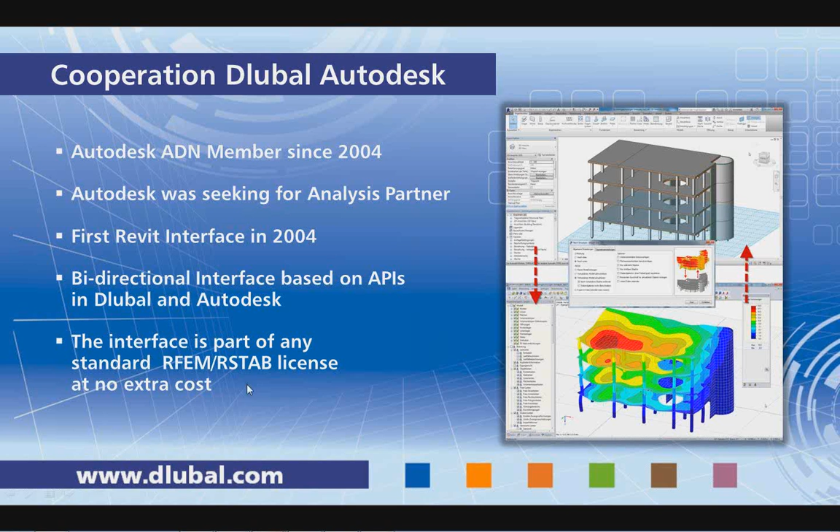The covered BIM scenarios are the following. We can export a Revit model to RFEM, and we can also import an RFEM model to Revit. That means we can use the analytical model which is in Revit and export it to RFEM, which is a great benefit. Not all CAD applications give us this chance. In many cases we have only the physical model, but Revit has the advantage that we have in there also the analytical model that we will see shortly, and we can directly derive a mechanically usable analytical model and start the calculation.

So the dominant way will be to export the Revit model to RFEM, but also in RFEM we can create large models pretty fast, and this work should not be lost, and also it is helpful in many situations that we use it then for further creating of plans or for doing some cost estimation. Or Revit is also a good access point to other Autodesk programs like AutoCAD and other CAD programs that base on AutoCAD. So once we have the model in Revit, we can most likely also use it in various other programs. So this is why we also implemented the export from RFEM to Revit.

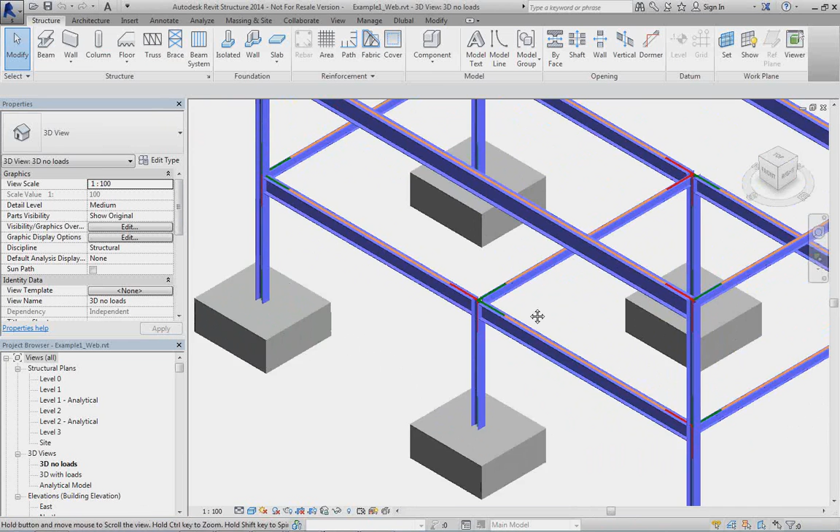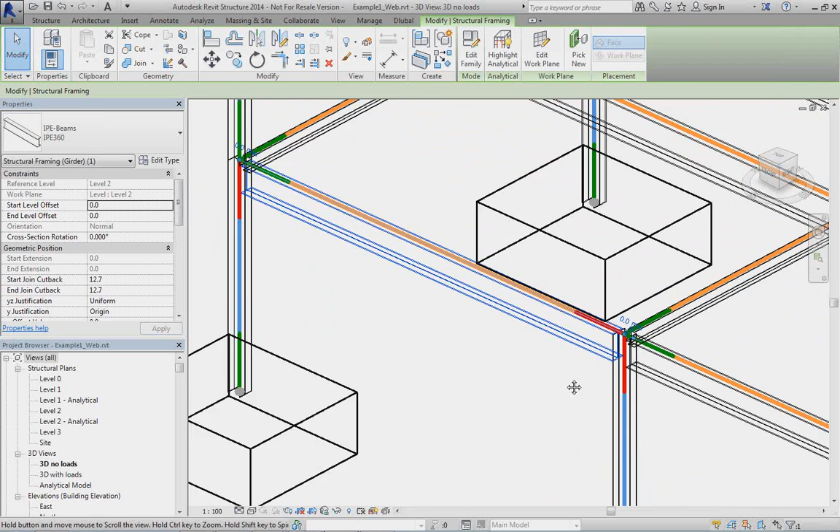In Revit, we see here a simple model consisting of columns and beams and some foundations. I can show the wireframe representation of the model, and we see here the physical model, which are the beams and the columns as we know them, the I-shapes, the I-sections, and we see also the analytical model, which is lying below or behind this physical model.

You can show this analytical model here, and we see that we have here a simple stick bar model, including the analytical nodes, and the beginning and the ending are shown in different colors. So when we click on it, we can see at the start we have different options than at the end. But let me start with the regular representation, and I will explain a little bit how this model works in Revit.

Each beam or each member I can select, and typically there is a dialog with properties, and I can arrange or align the geometric position of this cross-section. I see the cross-section name. I can also say, okay, the geometric position in direction Z should not be top, but maybe in the center. You see the cross-section moves upward.

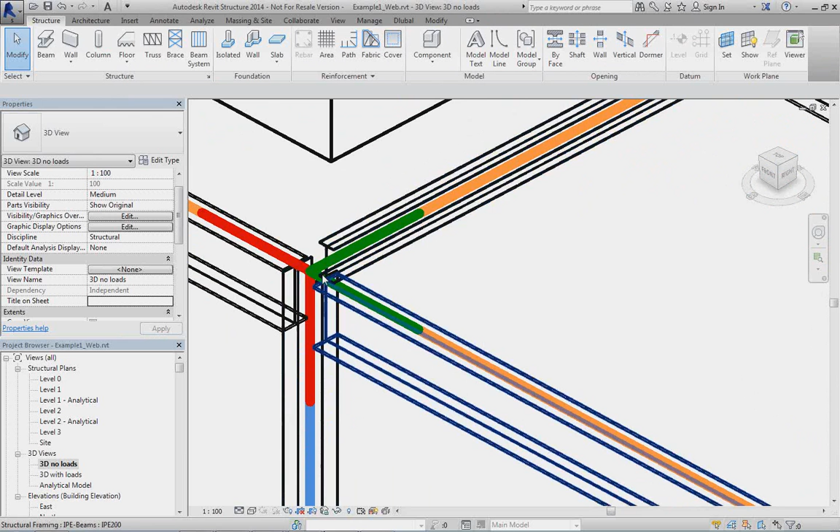You see also that the analytical stick model stayed on the same position. So we have an independent way to model the physical representation and the analytical representation of the model. You can also, when you select the member, enable or disable the analytical model completely. So if I uncheck it, the stick model for the analytical representation will disappear.

So when we export the model to RFEM, we only take the analytical representation of the model. And for example, if the analytical model is disabled, like here, it will not show up in RFEM. So this way you can define which parts of the structure that are of interest for the structural analysis will be exported and which ones will stay in the Revit model.

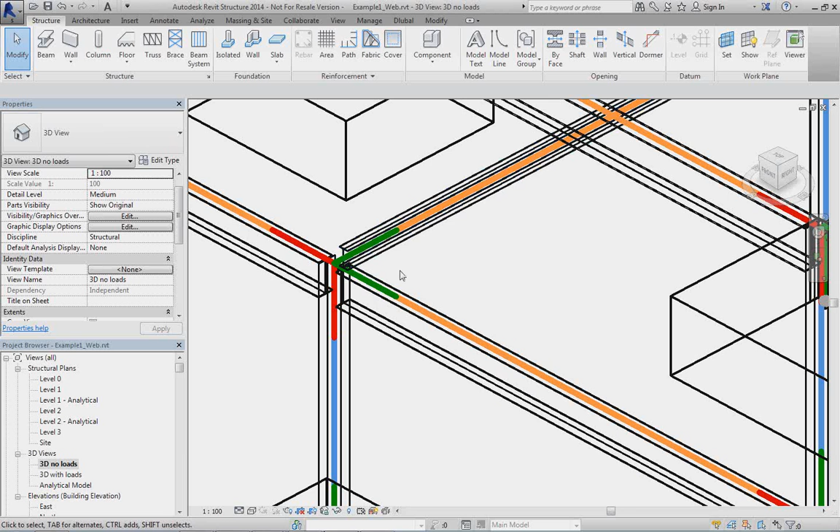Important is when we update the structure later, we do not change the alignment. If there is a new beam imported from RFEM to Revit, it will also always have center alignment because we don't know how we really want to have it in the real world. In Revit, the user can then adjust it. We'll see this also live later. For me, it was important to point out the two different models and show quickly how you can emphasize them, how you can change them.

Also, maybe I make one more change in the analytical model. In the analytical model, there are different properties. Here we deal with typical analytic properties like start release and end release. If I change it, for example, to pinned, then I will get a different release at the beginning and the ending of the member. Or we have also here the analytic alignment. So independently from the physical model, I can change it.

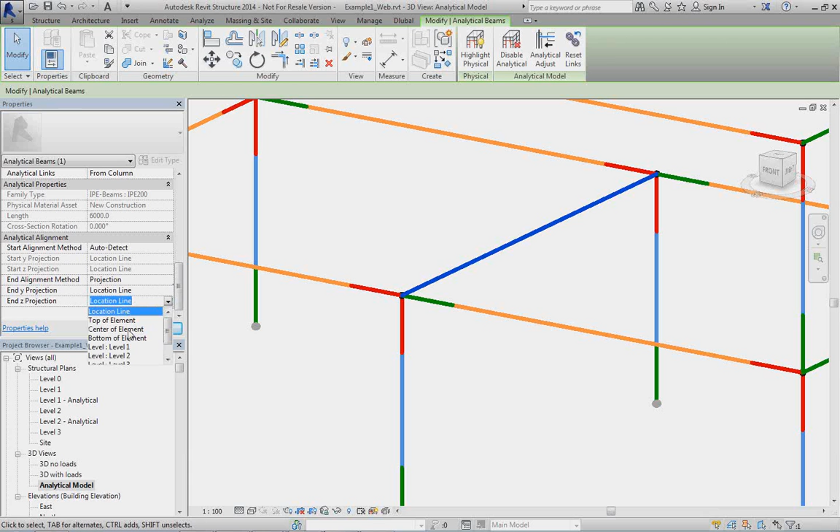For example, I can say the end alignment should be in the center of the element or on the top of the element, maybe center. You see it moves down. Here I would have, maybe I change it to the top. And I can also bind it to a level that I have defined in here.

You see here that it can happen that there is a gap between the two nodes of the horizontal girders and the cross beam here. I can fill this gap with a so-called rigid or analytic link that I can manually also enter in Revit, and it will then also be exchanged with RFEM. So there will be a rigid dummy member that connects those two analytical nodes.

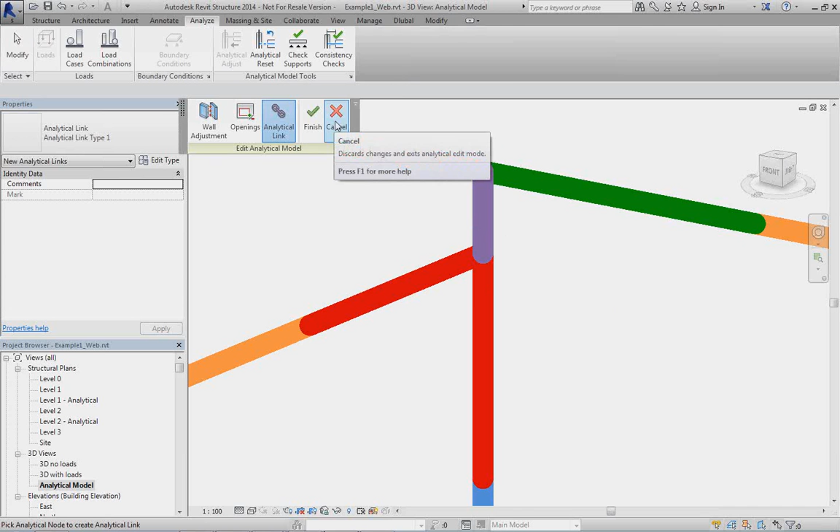So if you want to have really those eccentricities and those gaps of members filled, then you can use analytical links. In some situations also the analytical links are made automatically inside Revit Structure.

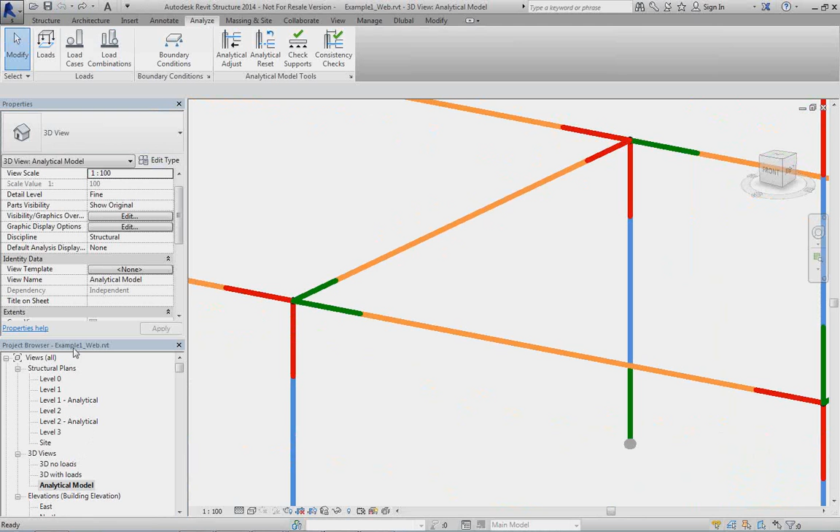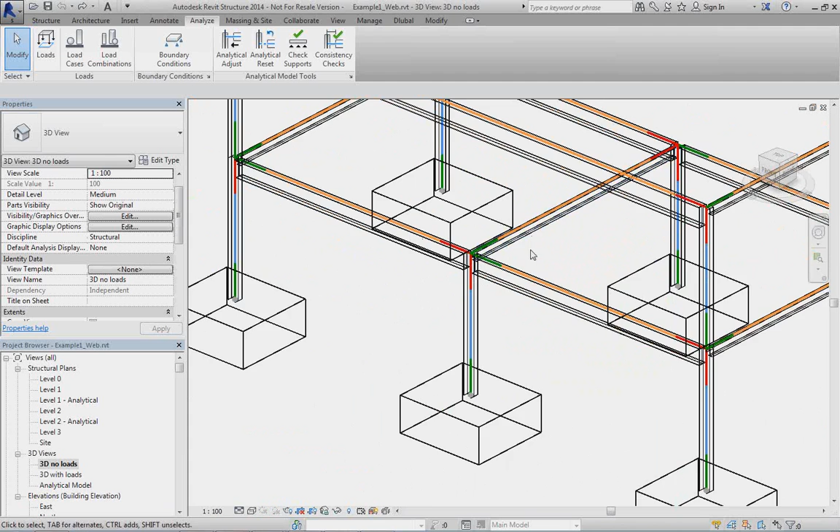Okay, let me maybe go back and start with the original representation of the model, and I go back to how I started out. I think now we are okay. And in the next step, I will then export the model to RFEM. First, I would like to display the wireframe representation so I can see both models in a little bit better way.

Here you see also foundations. Revit has a footing object that we do not have in the same way in RFEM, but typically structural engineers model those footings as a support condition, like an isolated support, and we can do this automatically and convert those footings into isolated supports. There are different options I'm going to show you.

When we start the interface, we find here a global menu, and we can export and import the model to RFEM or also to RSTAB, which is the more simplified version of RFEM that deals only with members and columns but has no surfaces and solids like RFEM does.

Okay, the interface is part of the standard RFEM installation, so it comes at no extra cost. If you would like to install it, all you have to do is install RFEM. Important is that there is already an existing Revit installation. So during the installation process, RFEM can recognize that there is Revit and it will automatically install the plugin. So if you don't have it, just reinstall RFEM and it should be available.

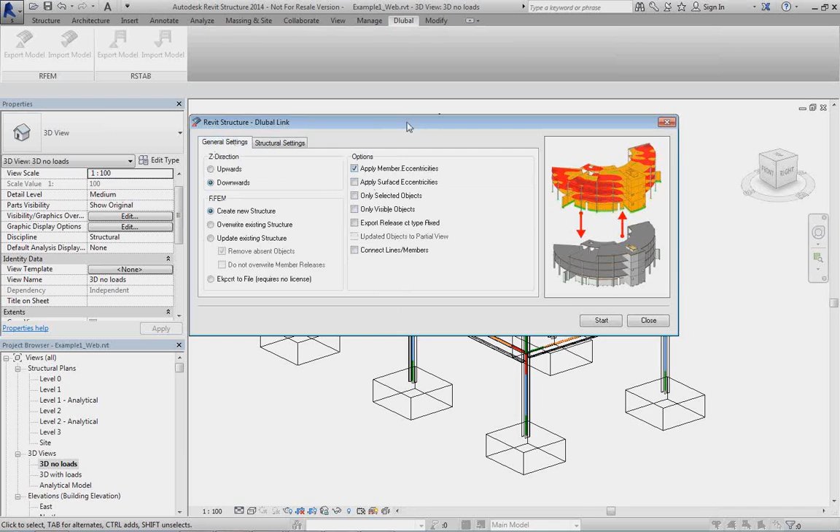There are two important checks here where we can convert isolated foundations to either a nodal support, which is a pin support, or to a surface with elastic foundation. So we're talking now about those supports that we see here in the background. And the same thing is valid for linear supports. If we have wall foundations which exist in Revit, we can create automatically linear supports from it. I'll show you this quickly, and I also show you the eccentricities of members and the difference if we export it with or without eccentricities.

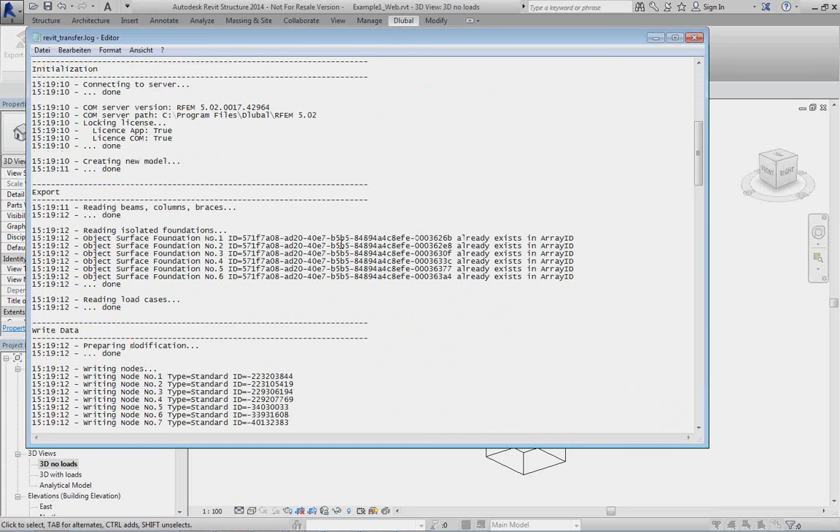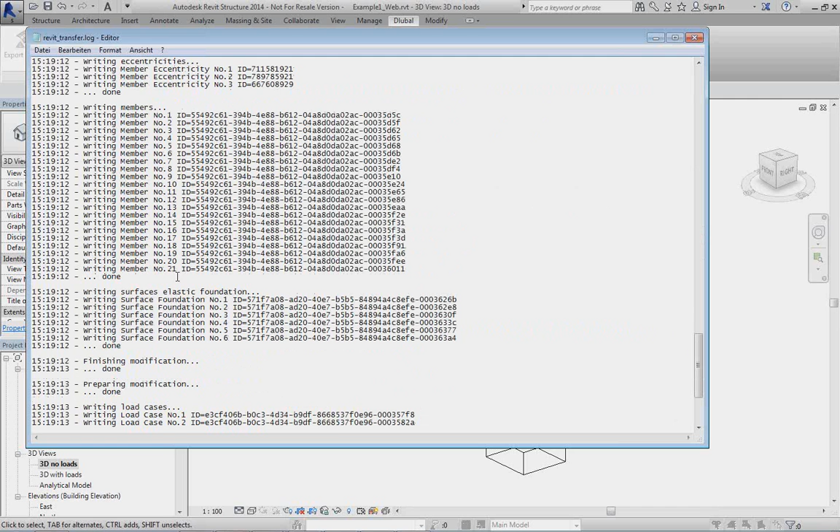So I start the export. We see a short protocol. All the changes are logged in a log file that can be used to track down problems or to find references between IDs in Revit and nodes, members, lines, and so on in RFEM. So this is a helpful file for different information that we can use in case we need to clarify some things.

I go to RFEM and I see in RFEM I have my model, and instead of a support we have here an elastic bedded slab that has some default settings for the springs for the support conditions. So you can change it anytime you like. In fact, you should check those conditions before you keep on calculating. We see here also we have releases. If I edit the column, you see here there is a member end release which comes from Revit.

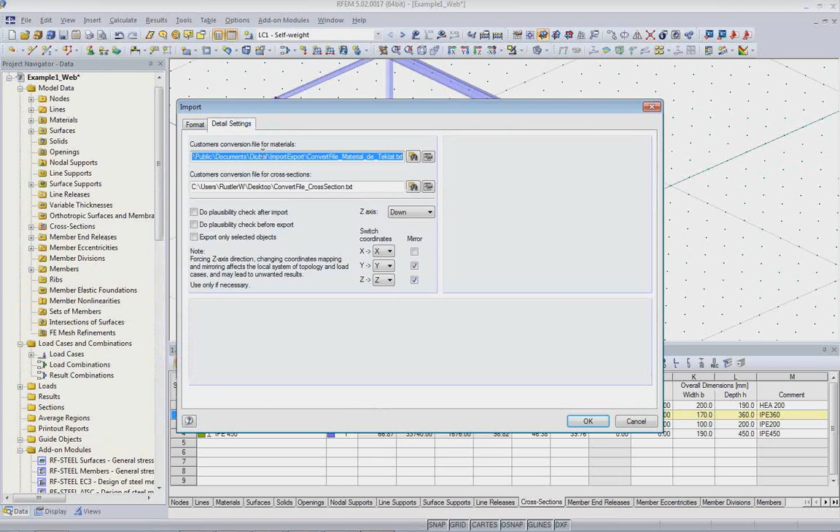So all these properties come from Revit. We see the cross sections have been converted. The name in RFEM is IPE 360, and in Revit it was written without any blank between IPE and 360. So we take care of it using those mapping files that you find at import or export, detail settings, and here you can edit those mapping files. You can also export and import them to Excel. So if you'd like to edit them in Excel, you may do this here.

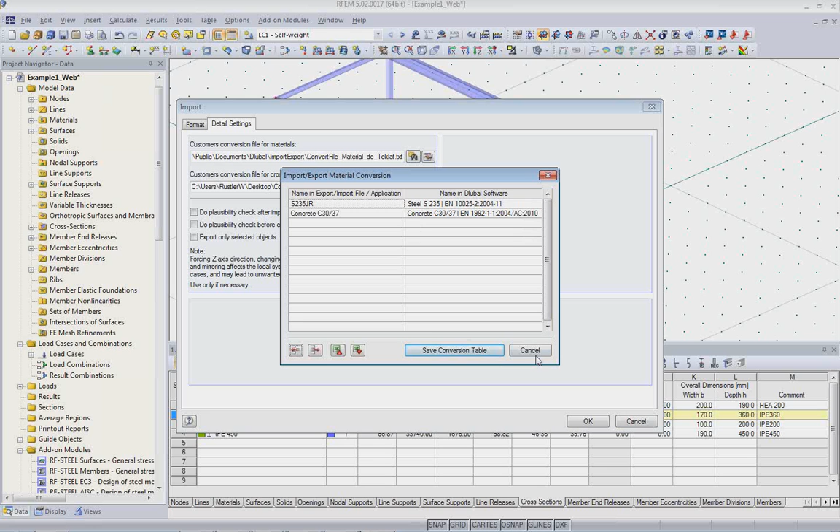The same is valid for the materials. You see here in Revit, the material is just simply S235JR, and in RFEM we also implement the code and we add the code designation there, so you can directly reference which material you want and also export and import to Excel.

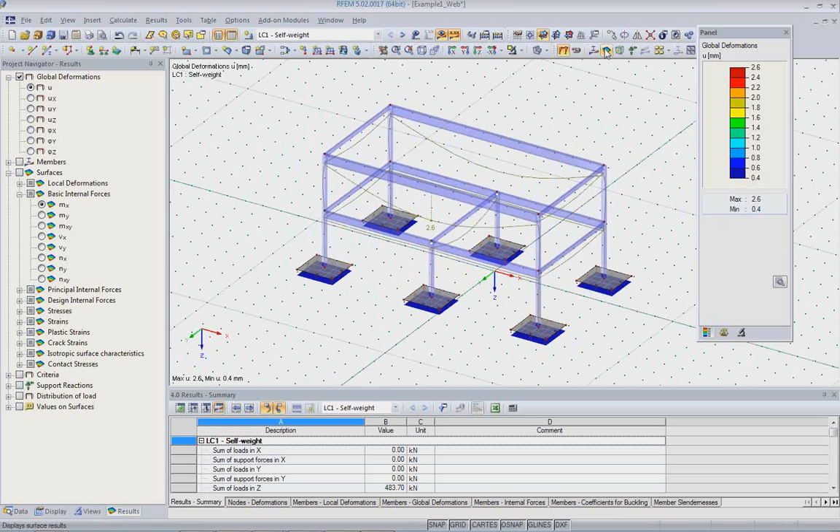This model here, if created correctly in Revit, you can run. You see we have here 4 load cases. There are no extra loads besides self-weight, and we can run the analysis, and it's a mechanically working model, and we see here deformations, internal forces, and also results for the foundation slabs.

It's clear also that it's maybe not such a good idea to model situations like slabs where there's a column with just one node connected to a slab. We cause singularities. You can change the model as you like. It is a totally independent RFEM model at the moment. You don't have to update it back to Revit. It's just a regular RFEM model. So there's no limitations. It's just as if we would have modeled it manually.

Let's take a look at the eccentricities. We see here the structural or the analytical nodes have been taken over from Revit, and all the members have been put eccentrically, so we have top alignment on the top flanges.

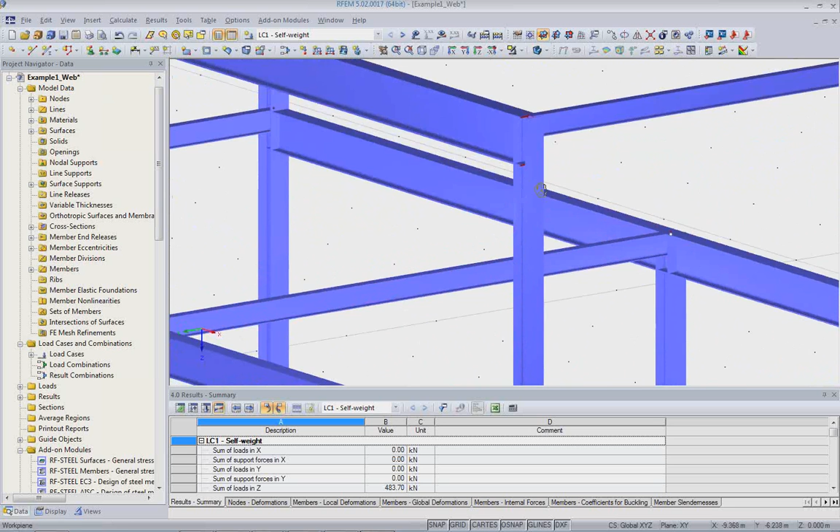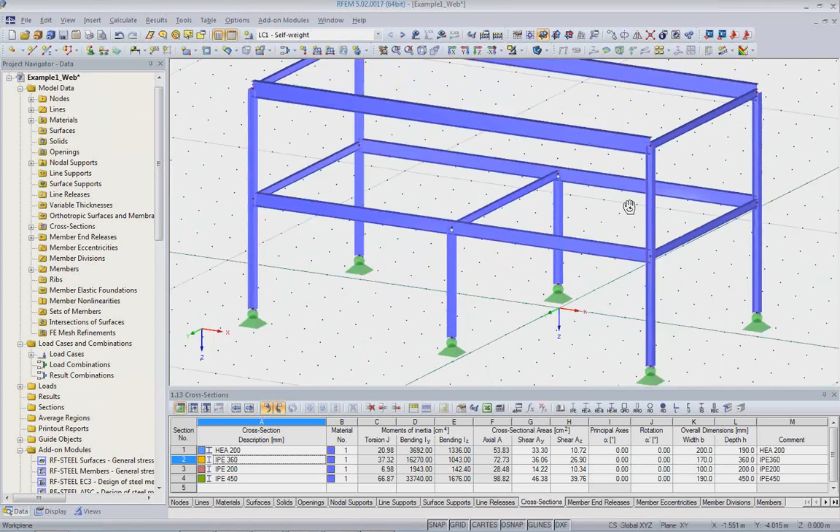Okay, I can do the same thing again with different options. Export model. I do not apply member eccentricities, and I say please use nodal supports, and I can just update the model. And if I go to RFEM, then I have a more simplified model with isolated supports, and all the beams now meet centrically, center lines.

It's up to the user whether he wants to work with or without eccentricities. If I run the analysis, I get slightly different results, of course, because everything depends then on the model. Okay.

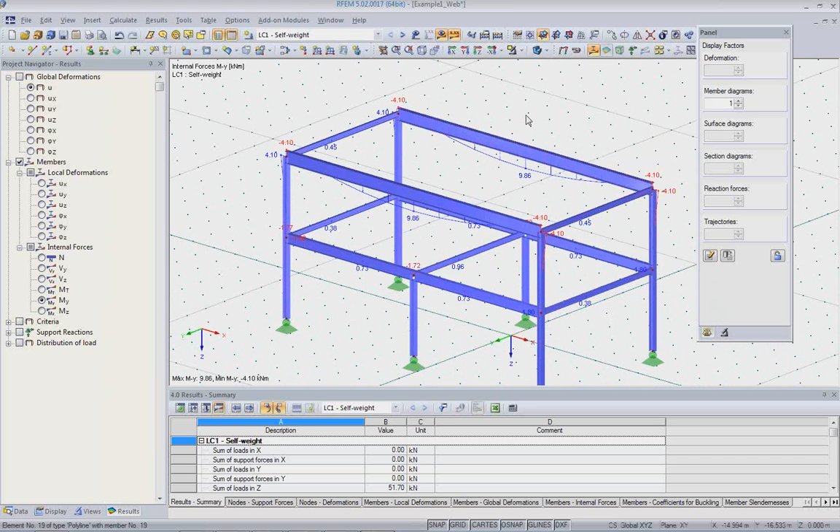Typically, then we do some changes. We do the structural analysis, structural design, and this involves changes. We might need additional beams. We might need additional columns. We may change cross sections. I'm not going to do a full design procedure now here inside RFEM. We have several other webinars that you can find online on our website, where you can see this in all details. But I'm doing some manual changes here so we can follow the update procedures and demonstrate them.

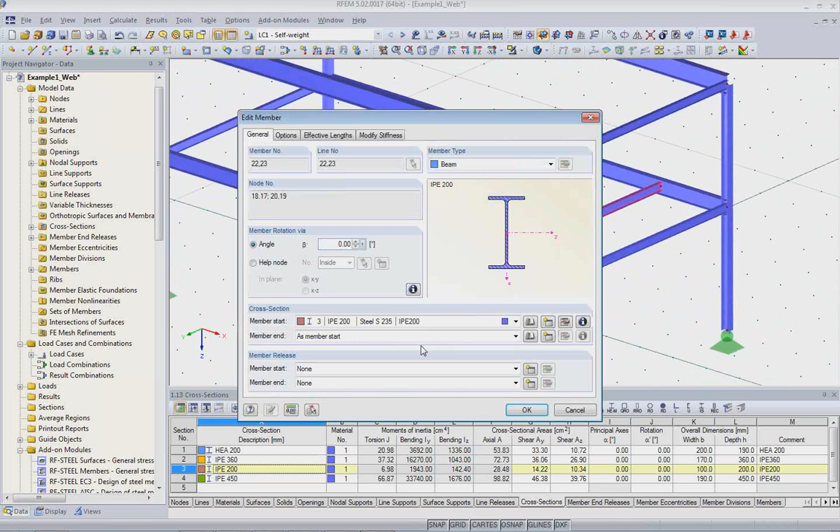I'll just make a copy or a couple of copies of this beam here in a distance of 2 meters, and we have here a couple of intermediate cross beams. Maybe I want to use a different cross section for it, and I create a new cross section. Let's make it pretty high so we can see the difference. Okay, and maybe this is the result of my structural design, that I need a different cross-section.

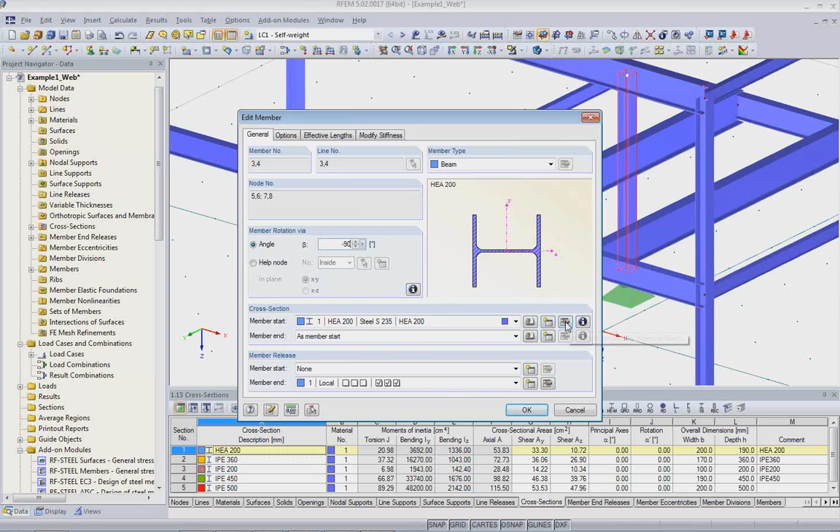Maybe also the result is that this column here and this one should be rotated in the other direction because there's a bigger load in this direction, and maybe it should be also a different cross-section. Maybe we want to use 300 for it. This is a result of the structural design. Because I changed the entire cross-section, this means that also all the other columns that use the same cross-section use also the same. I have also now the HEA 300 cross-section.

So what I did, I added a couple of members, I changed the orientations and changed the cross-section. So when we're going back to Revit, we have to update those changes. So I import the model, and I can just say apply changes, and I update the existing structures, and I start the import option. So now Revit and RFEM communicate, and all the model parts are compared, and I get here the updated model.

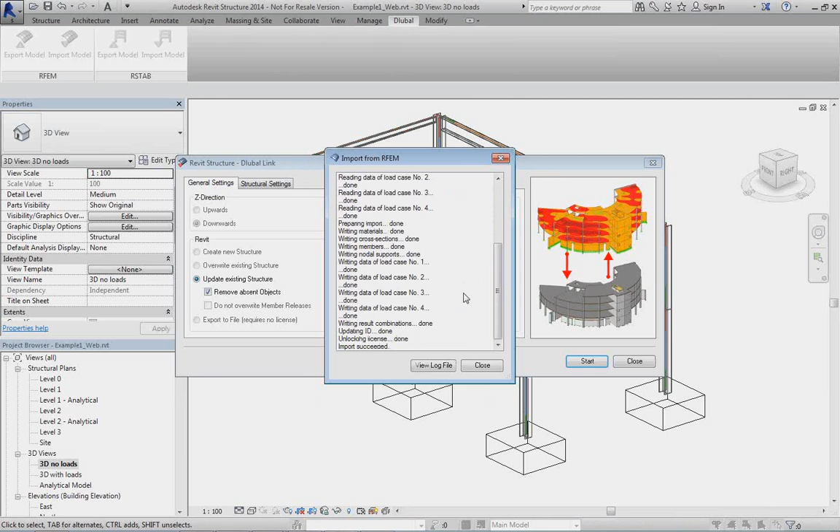And we see here we have the new beams, we have the changed orientation of the column. When I select it, we see it's a 300 size column, and everything otherwise, like the alignment of the original beams, stayed the same. And here, because these are new beams, we don't know how the Revit user wants to have them aligned. I can do this now manually, just by selecting both beams, and change the justification maybe to top.

You see also the analytical model moves with it because it's set to center, but I can also say here I want to have it either on top, or there's an auto detect function in Revit for the alignment, and if I do this, it will be moved to the next horizontal cross beam and will be connected there automatically.

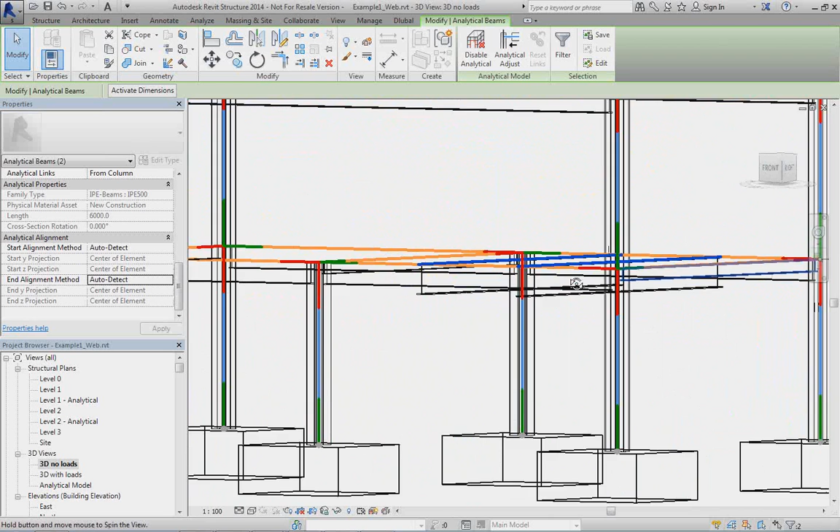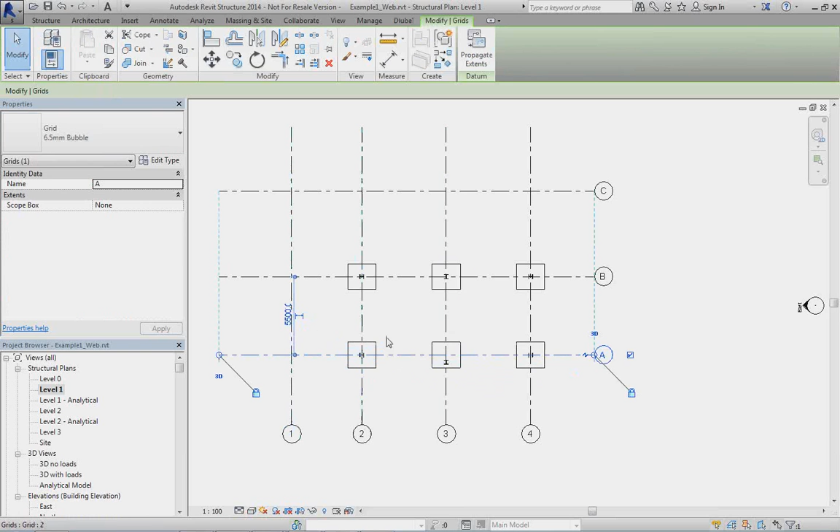The same way I can do changes in Revit. If I go to the top view, maybe I want to change the distance here from 6,000 to 5,500, or also the distance here from 6,000 to 5,500. So Revit has a nice feature that you can automatically move those columns and so on in the model. Let's do it one more time. Let's say 5,500. If you change the grid, and if the columns are linked to the grid, which obviously is done here, you will get the cross sections move automatically.

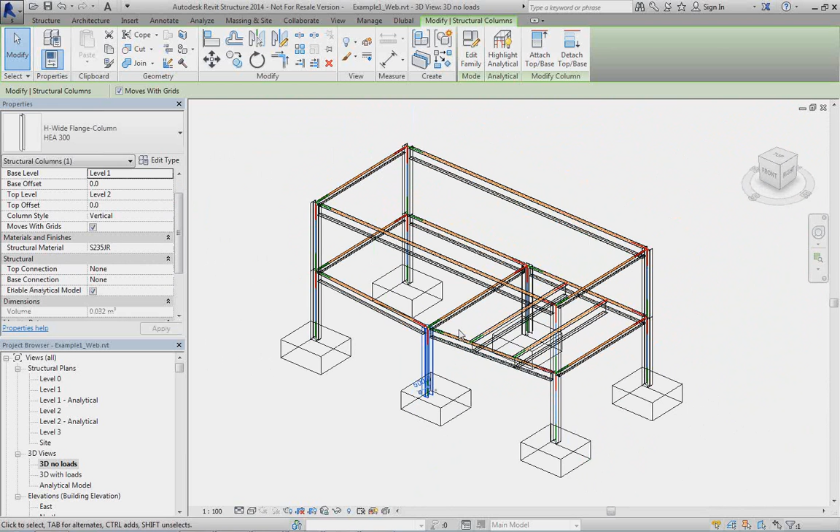So now I have to see what's wrong here, because it should be centered, and this moves with grid should be part of the grid. So why is it moved? It should be moved to the grid, so I have to move it now manually. This should not actually happen for whatever reason. Okay, go back. Maybe I move it manually.

Let's say I can change those cross beams here. I can say I change them to 1,750. And I can also make a different change to 2,500.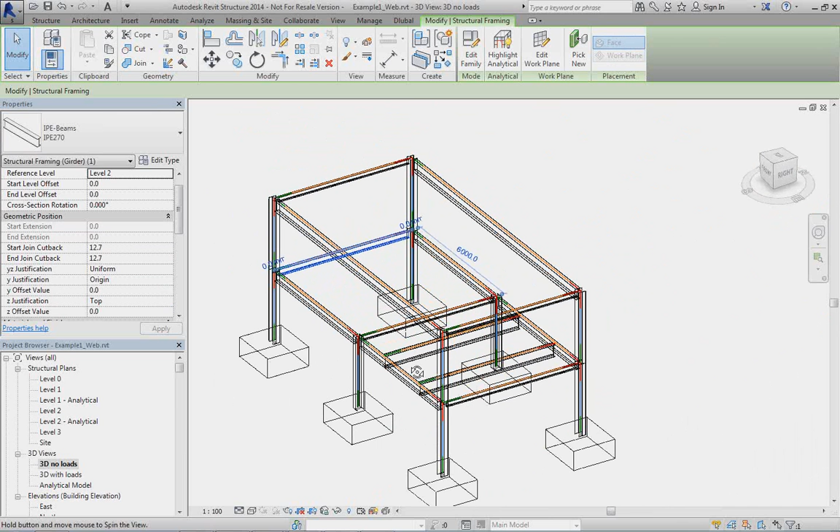So also maybe somebody wants to have a different cross section here. We can assign, for example, 270 for whatever reason. Maybe it's cheaper to buy it. I make those changes here, and the same way, I can update the model then to RFEM. I keep the standard settings as I had them before, and I start the update procedure, and you will see then that everything is changed here.

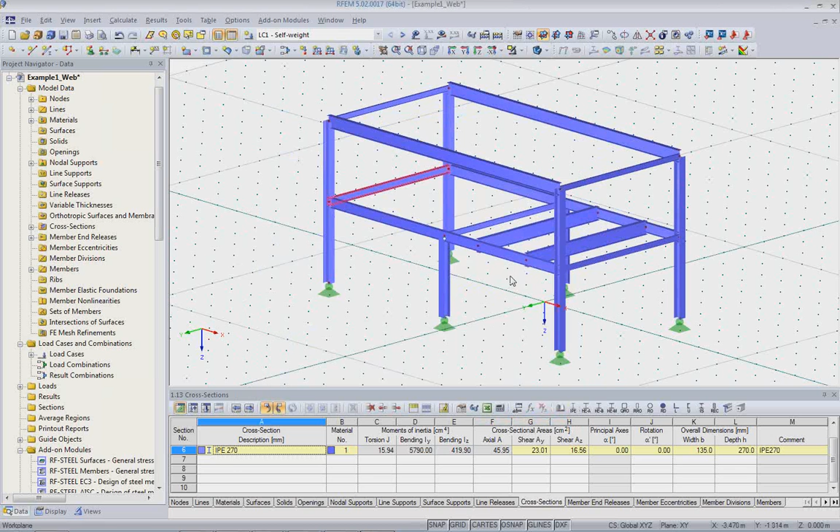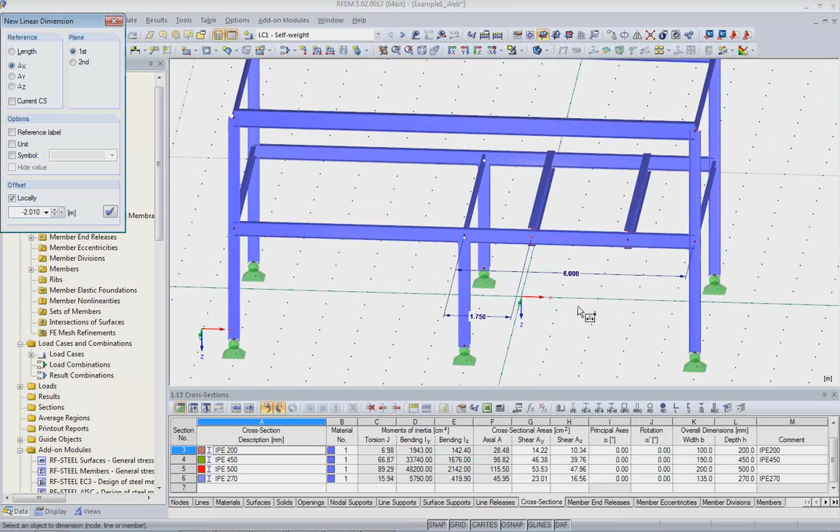We should have a different cross section here. If I edit it, it's a 270, and this one was a 200, so it's bigger. And we see also here the distances should be changed. I can make some dimensions here, which is 6 meters, but I have to select the nodes. Here we have 1750, and here we should have, that was the wrong node. Here we should have 2 meter 50. Yeah. So all those changes have been carried out.

Okay. Another important thing is what happens if I don't want to take over the entire model. Maybe I only want to take over part of a model, maybe just a level. I don't want to have a 3D model. I can also do this. I can select part of the structure. I say export, and then I handle only selected objects. The same way would be if I only create a visibility of certain objects, only display certain parts, and I can only refer to visible objects. That will be a similar setting.

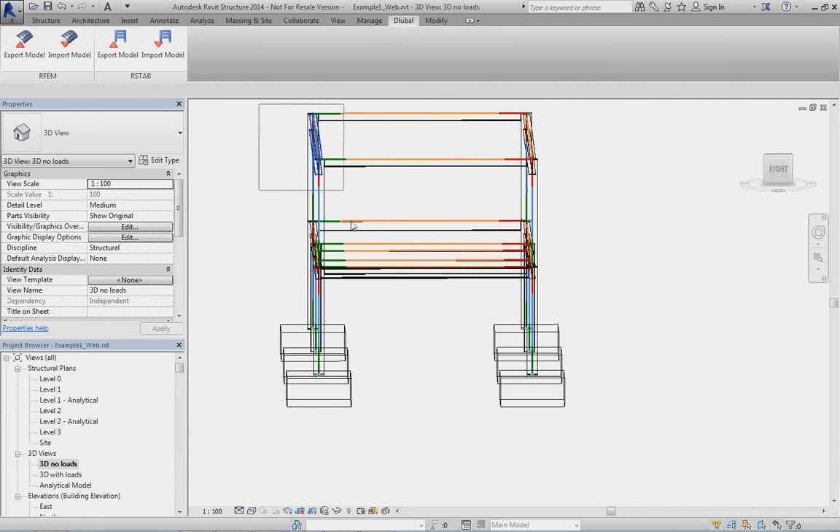This time I create a new structure. If I do this, then we'll see that there is only this level, the grid of this level. I can do this the same way, for example, with one frame only. When I say OK, global, export, only visible, only selected object, I create a new structure, and I'll get only here this one frame.

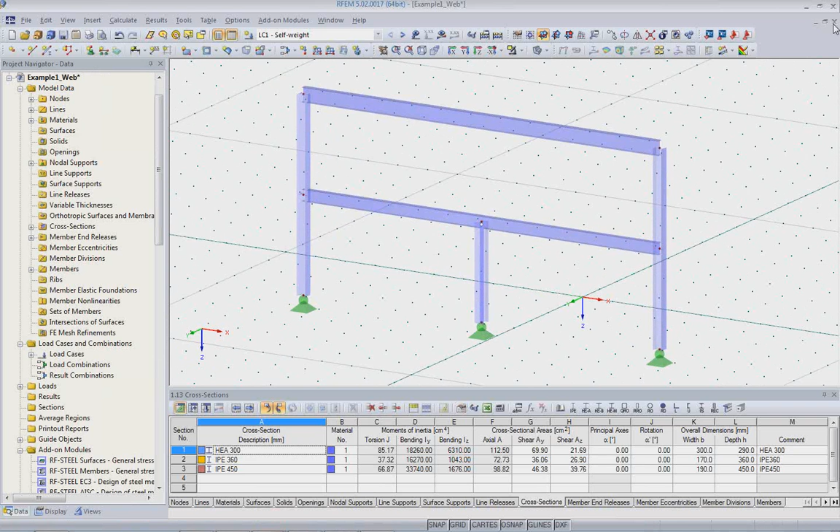Let's say there is a change, and maybe I close this one. And in my design now, I find out that those beams here can get by with a smaller cross section. So I can change it to 300 maybe. And now I want to do an update from this model, which is only part of the entire structure. How to do this?

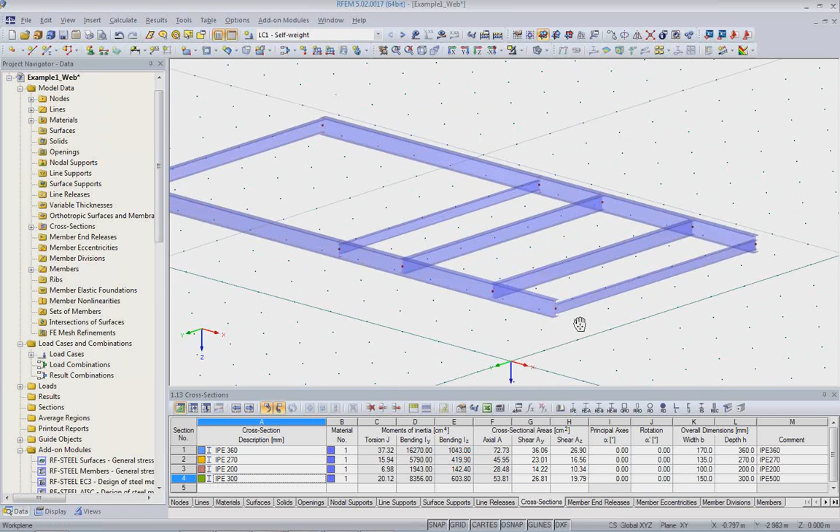I go to Revit, and inside Revit I can import the model from RFEM, and here's a setting that's called Remove Absent Objects. So if any part that I see here in Revit is absent in the RFEM model, it would be removed. If I uncheck it, we keep all the parts that cannot be found in RFEM inside Revit and only take the ones that we find in RFEM.

So Revit or RFEM compares two models, and we see, okay, there is a cross beam that has the same internal ID and that has a changed cross section, and I take the changed cross section, but I cannot find the column in the RFEM model, but because this check is gone here, I'll leave it there. So if I do this, import, and I start it, now I have to decide which model I want. I should have saved the first model under a different name, so it would be better to distinguish, but I need to use the second model because it was created after the first model.

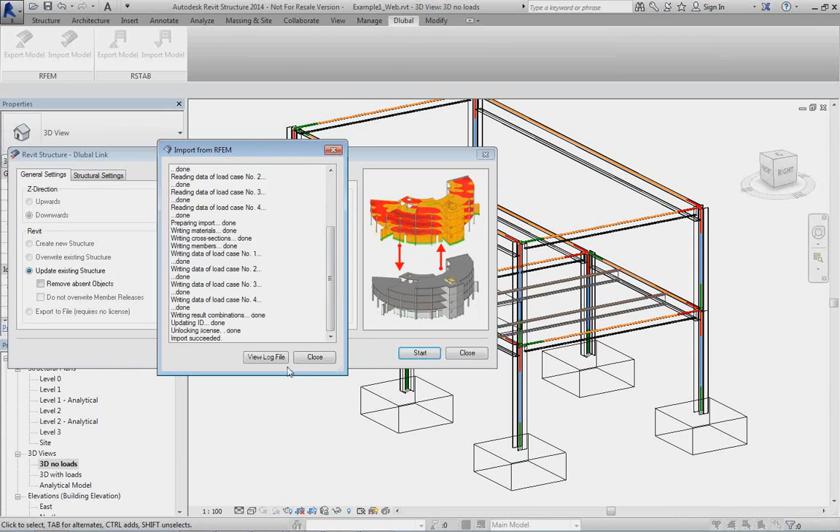And if I do this, we'll take the changes, and it will update my cross-section. You've seen it has changed. It will update my cross-section without touching the rest. And also please note the alignment of the structural model and the top alignment of the physical model have been unchanged. So those are important concepts to understand.

So you do not have to work with the entire 3D model. You can use one slab, one level, one frame as you like. You can split your model into different parts. You can also add entire buildings into one complex Revit model. Or if you have a complex Revit model, you can export only one building to different RFEM files. So you have the option to combine those methods.

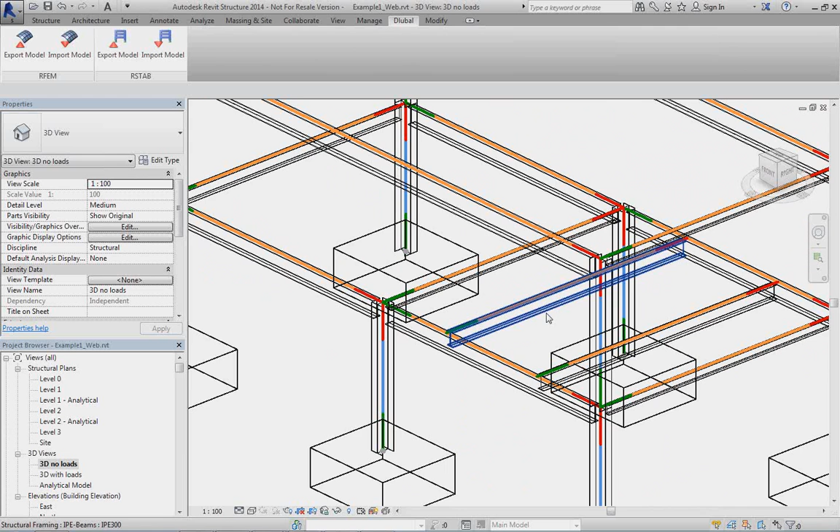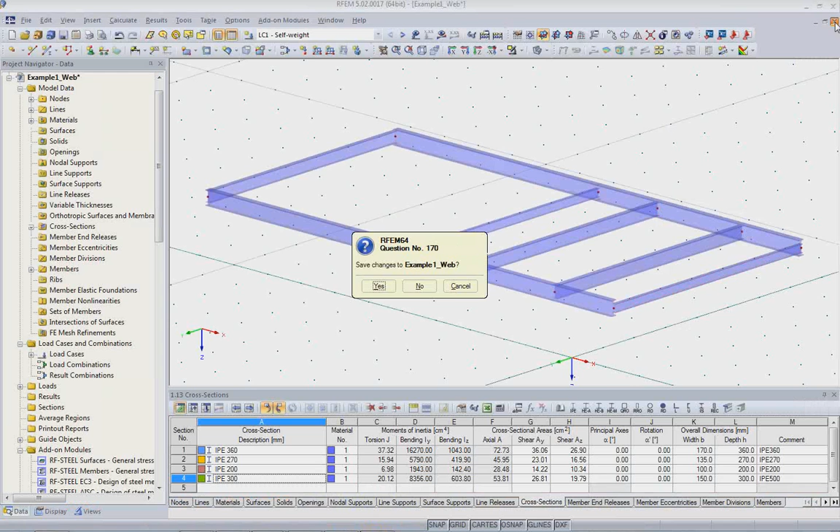Okay, this was the first simple model. Next, I'm going to show you a different, smaller model that has some surfaces or slabs in there. I open the second model here, and I'm going to show you some new things about how to handle floor beams or beams that are eccentric in Revit or in RFEM.

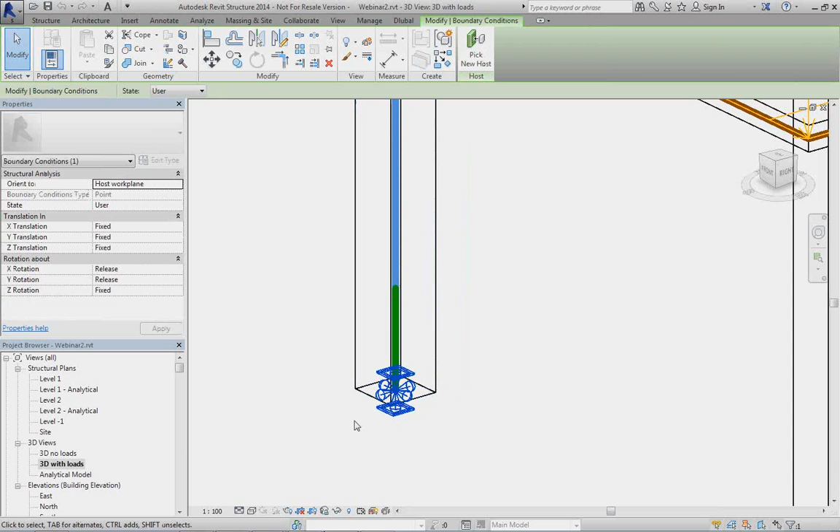We see here a simple model with two slabs, several columns, and it has different loads in here as well. We have horizontal loads and vertical loads, and I'm going to export it. Here we see also in Revit we have support conditions, and these support conditions you can already edit in Revit. You can assign individual linear or point supports, or also surface supports, and I'm going to export it the same way as we did before.

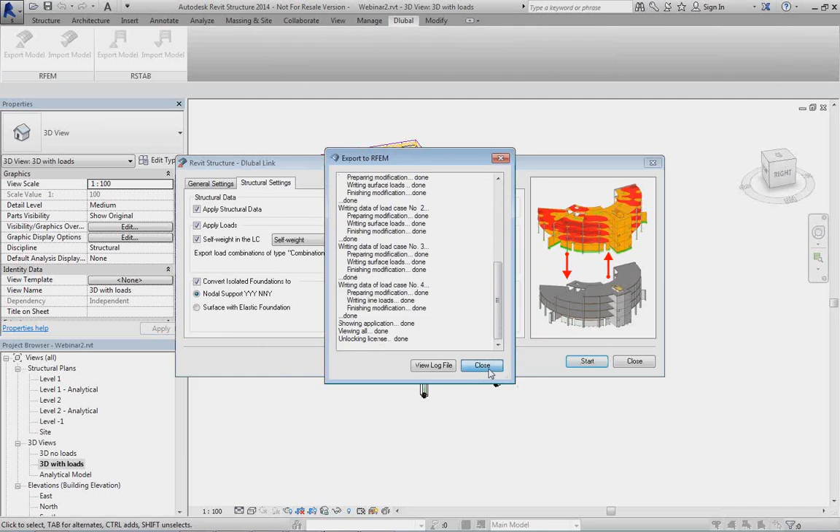We export the model, create a new structure, also include loads, and run the export. So a new model is created in RFEM. Since we have loads here, we can right away work with it. We can take a look at the loads. They are all here—you see area loads, snow load, live load, wind load, for example.

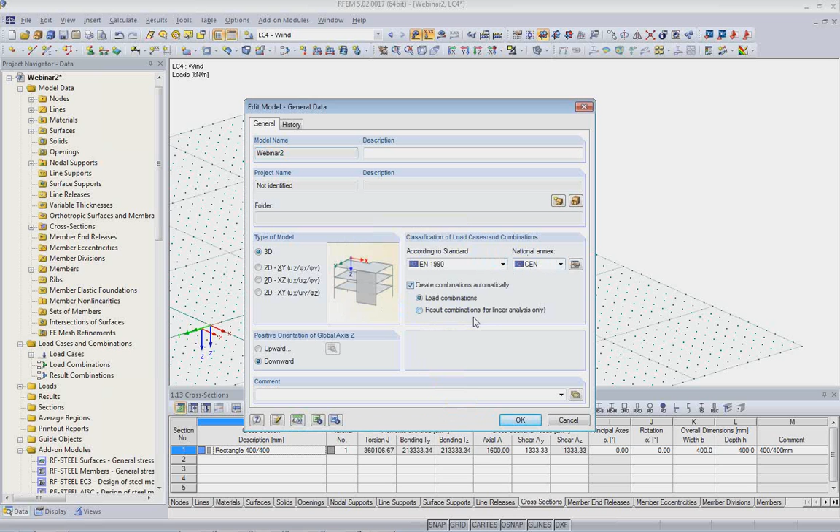There are no combinations, only the basic loads here, and inside RFEM I have powerful options to create combinations according to different standards. I use Eurocode here and want to create combinations automatically. If I do this, I get additional tables in the loading, and I also have the option to assign actions and decide which design situations I would like to use. You can do it in different ways, and I want to use load combinations which combine the loads according to Eurocode in this way—so we have factored load cases.

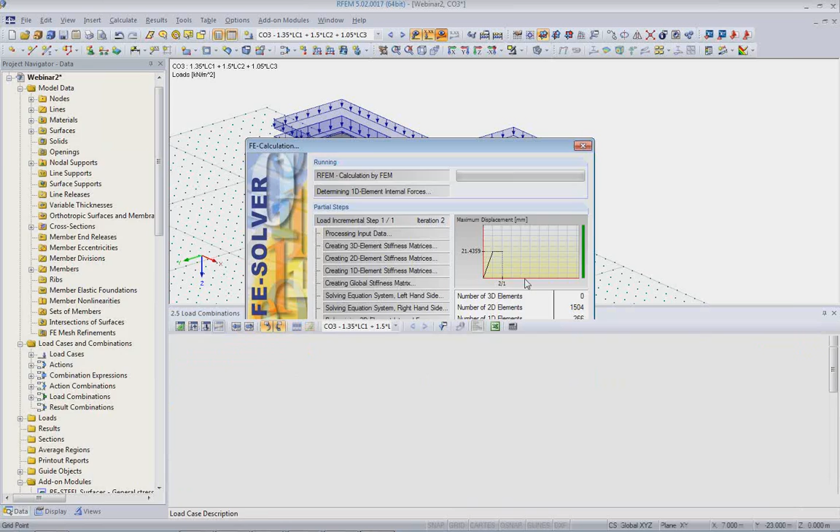I can run now one of these load combinations, for example, to check if the model came in from Revit correctly. And we see here we have a nice deformation plot, but there is also a problem because we have a large deflection here.

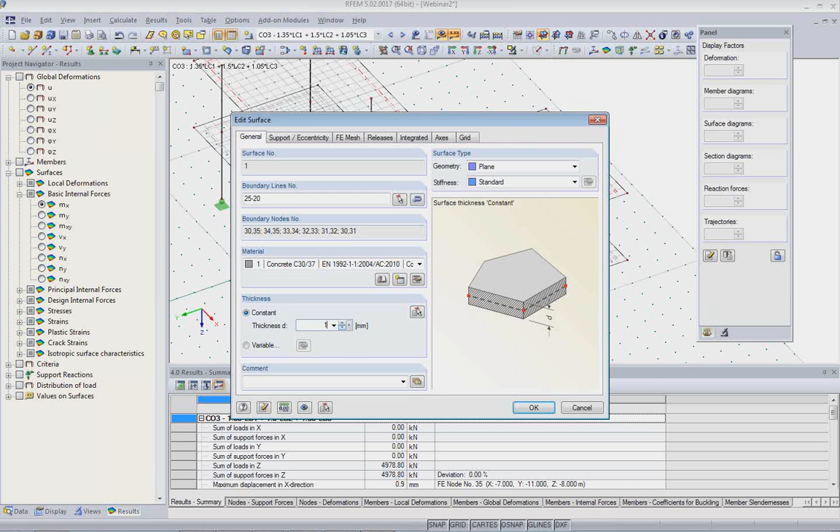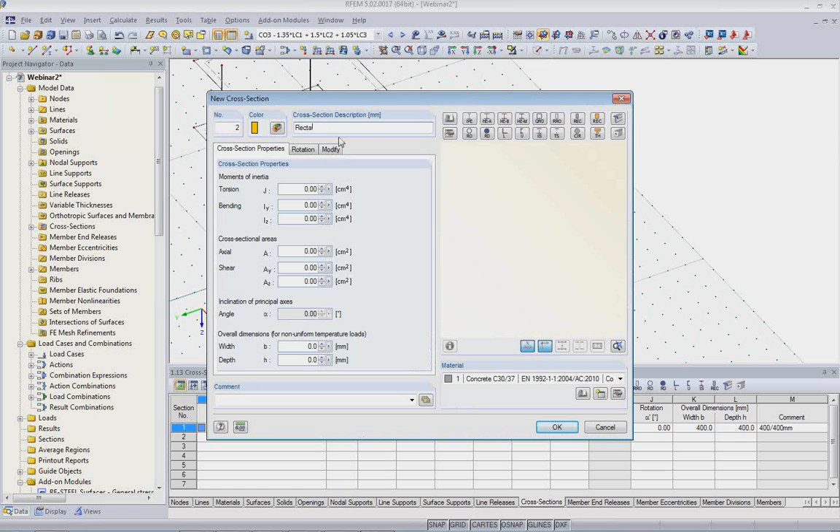So how typically do we want to fix it? We want to say, okay, maybe I can get by with a less thick surface, but instead I would like to have a cross beam here that strengthens this long gap where the column is missing. So for this I'll just enter a line and make this line into a member, and I assign a new cross section. I use again a pretty large cross section, so we see it clearly in the Revit model.

And here I check 'rib.' Rib is something which aligns a cross section just underneath the surface slab, so the eccentricity is calculated automatically. I can also assign the rib an integration width, so the internal forces of this cross section that I'm going to design later are integrated from part of the slab internal forces and the beam internal forces. It's a special procedure that we need for design of this member.

When I do this, you will see in the rendered mode that the beam cross section is underneath the slab. There's a small gap because we don't show by default the thickness of the slab, but it's now exactly underneath the slab.

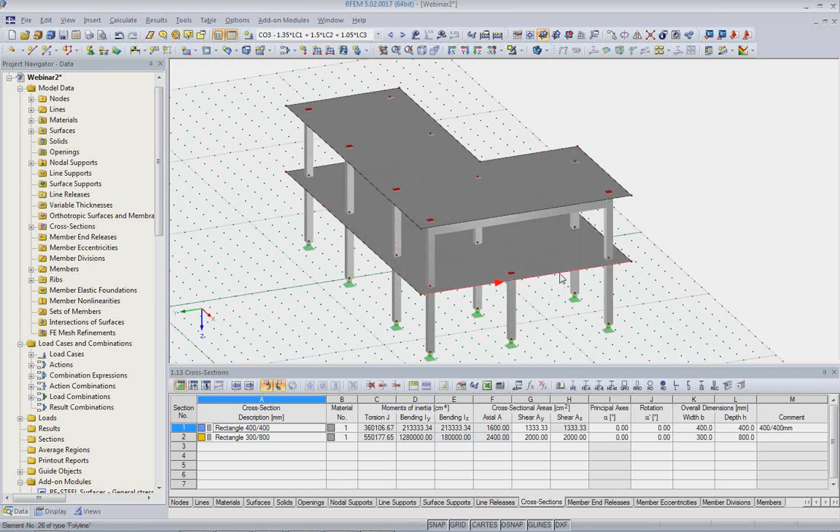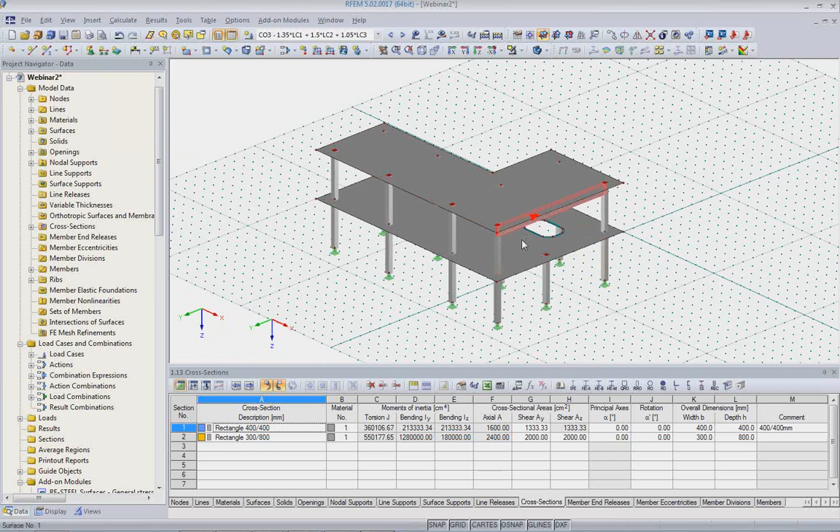At the same time, I also would like to enter an opening here. For this I need to set my grid to the right level, and I can create a simple opening here, something like this—for a staircase maybe. So I made actually three changes: I inserted the beam, I changed the thickness of the slab, and I also made the opening.

How do we exchange those things? Again, the same way—we import the model from RFEM. Now it doesn't matter if I remove absent objects. Structural settings I can leave as they are. I start the import, we compare both models internally, and after a short time we will see the updated model inside Revit, including the combinations.

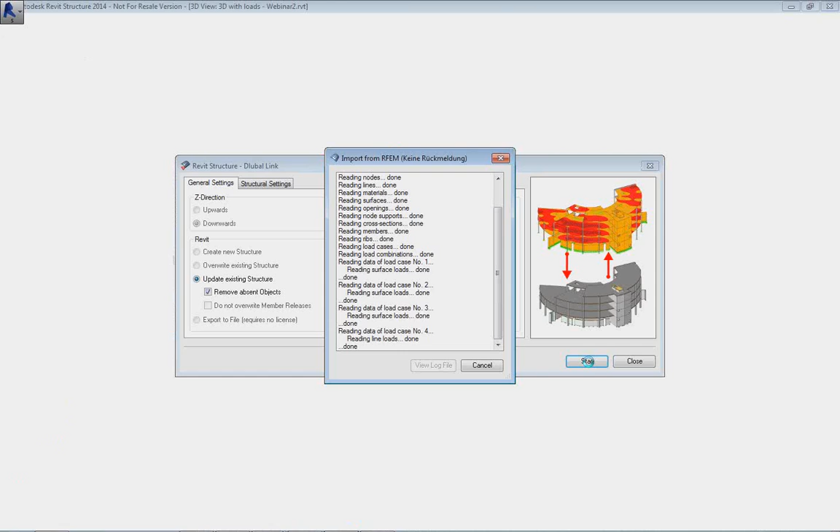That's the first change I did—we see here now the opening, and we also see there is the extra beam in here. I can also select the floor, which is now 160 millimeters. We can see if the beam is correctly placed under the slab. If I go into a view, you see here the beam is just underneath the slab.

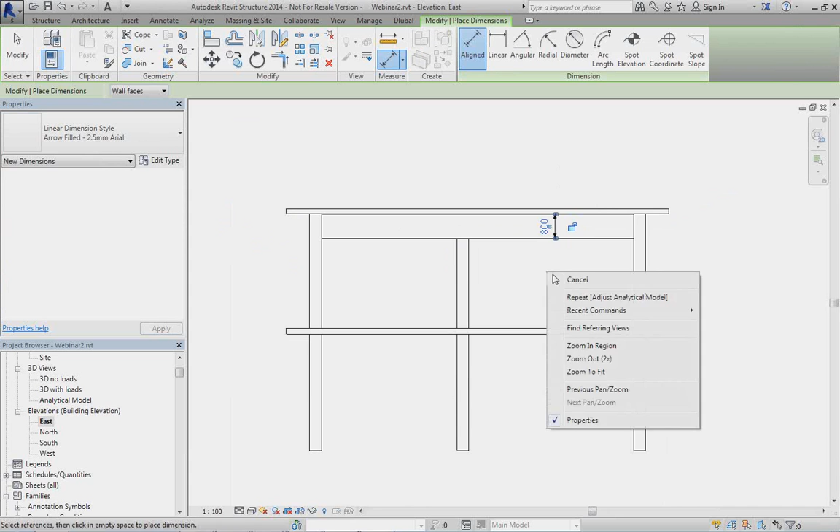I can also check it if I put here a dimension line. You see here exactly 800 millimeters, so it's exactly the height of the cross section that I created.

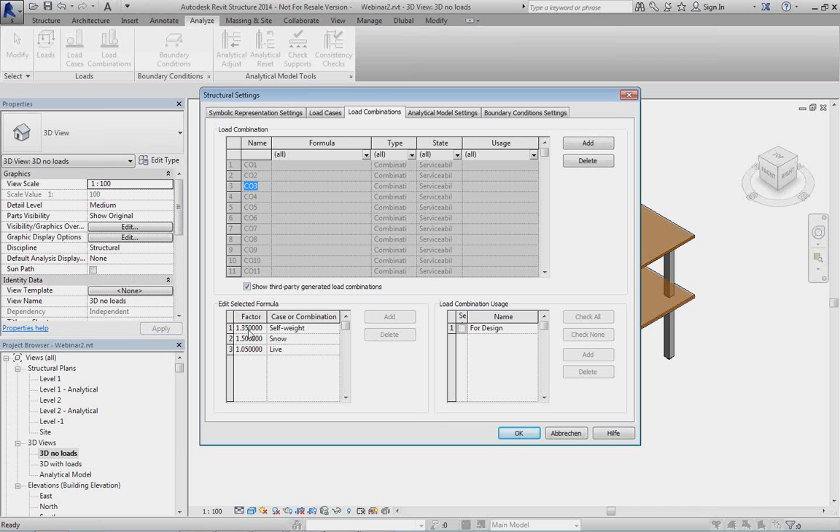I can show the imported load combinations. You go to the Analyze menu and you see your load combinations, and you can show the third-party generated load combinations—they're all in here, with the safety factors that RFEM created. So you do not have to do it manually; you can use the tools of RFEM to create the combinations and import them.

By the way, you can also do this: when you import, you can just import loads. So you can uncheck the structural data, and only the loads will then be imported. Maybe your model is correct, but you need the load cases and the loads—so you import only the loads.

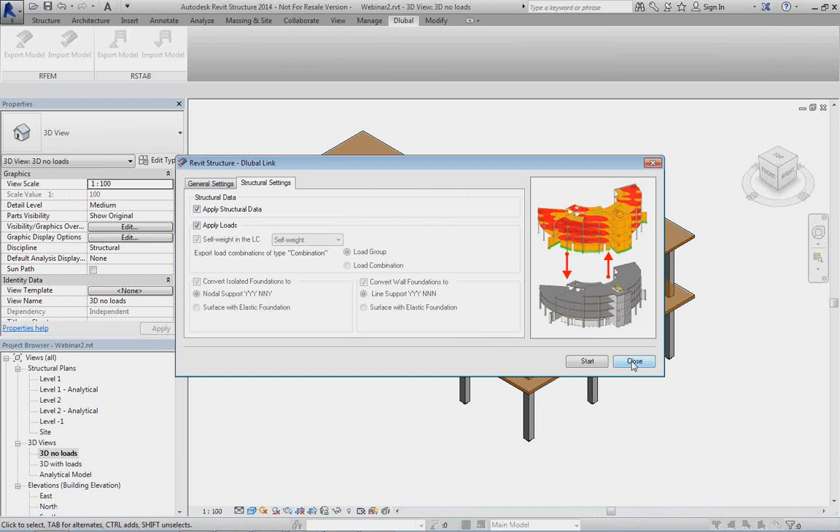Okay, this was the second model. Now we have another model, a little bit more complex. I close this simple model here to avoid any confusion with where we exchange data.

I close all models and go back to Revit, and here I have a more complex model with a 3D steel structure and concrete structure. You might have seen this model already in a different webinar I did earlier, where I showed the design of Eurocode in a bit more detail.

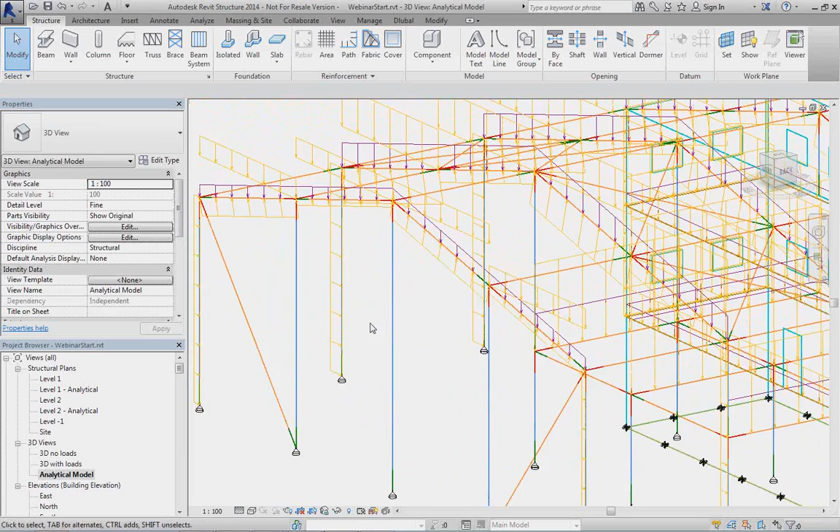This is now fully modeled, including loads and load cases. We have snow load, wind load, lateral load, and support conditions. I took care of the correct alignment of the stick model in RFEM. The releases are set, and now we can use this model and export it.

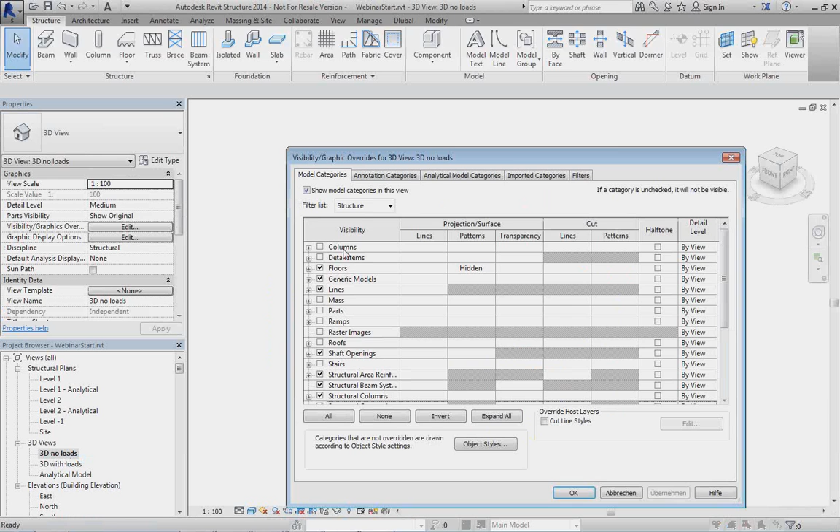Maybe I should hide the analytical model here. We can export it to RFEM, run the calculation, and then do a short design and update some cross sections. So this could be the scenario of this conceptual design. So how to do this? Dlubal, export model, create new structure, apply loads.

We assign self-weight to load case self-weight, and we start the export. Everything seems to be okay. We go to RFEM. We have here the entire model, including supports and releases.

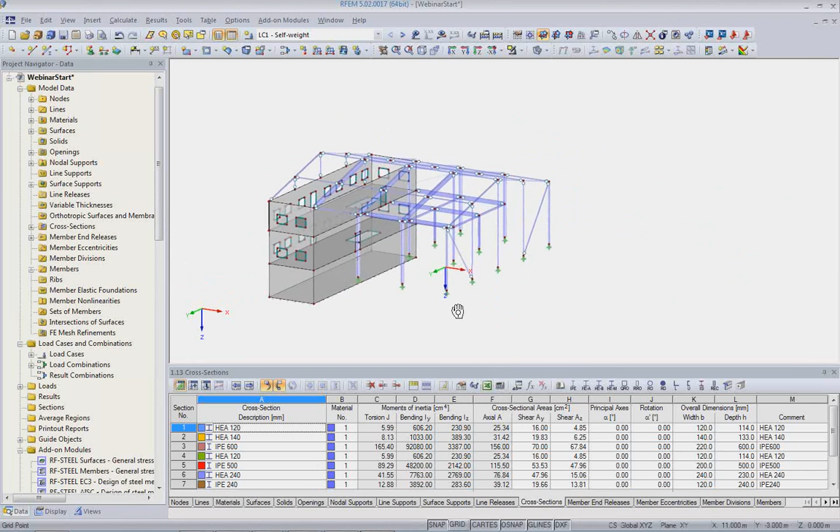We can show the loads. We can see the wind loads. We can see the live loads, and the combinations as well, because in this RFEM file I had also combinations.

One thing I have to do, because this is not possible in Revit yet: I'll select all my bracing cross sections quickly and change them to beam type tension, or member type tension. As you can see, we have many different settings, many different types of members that an application like the BIM software Revit does not have yet.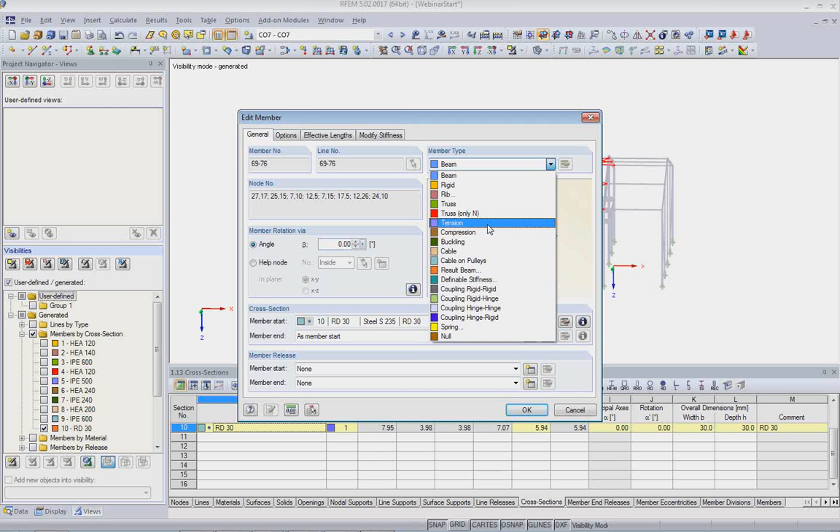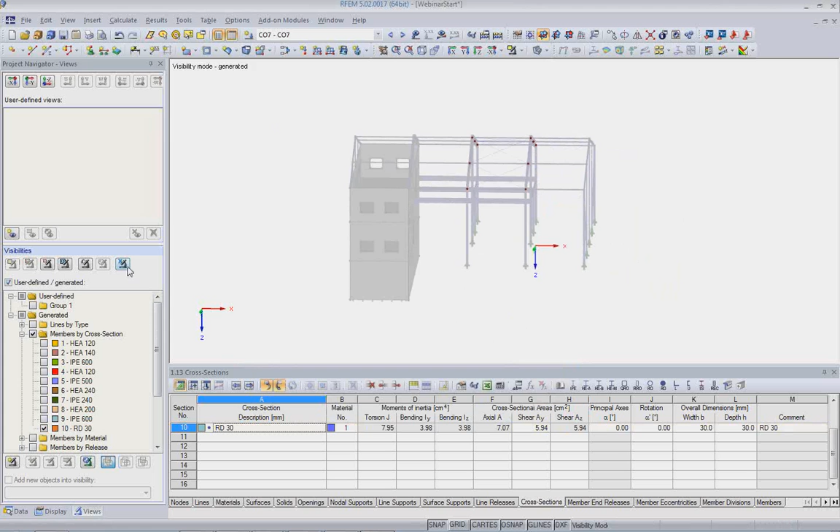Maybe it will have this in future, but there are many other things that are part of structural design not included in Revit at the moment, and maybe also not necessary. So it's up to you whether you pack everything into Revit or not. But some changes might be necessary, and one of them is the tension-only setting I do here. Now I go into our Eurocode 3 design module.

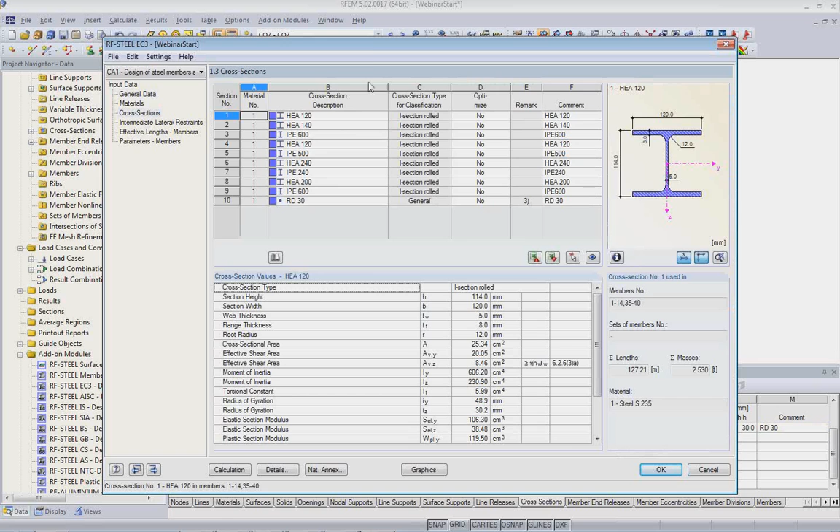Maybe I'll take care of the Eurocode design of the beams quickly. For now I'll just do a brief conceptual design. I go to the cross sections and check a couple of cross sections for optimization.

I want to optimize my main beams and columns of these main frames, and I'll pick the right IPE cross section, hopefully, and run the analysis. So now the RFEM analysis should be starting, and we calculate quickly those combinations.

You see there seem to be no problems in the analysis. Everything iterates, so it's a fully working model. It will take a few seconds now before we can do the optimization in RF-STEEL EC3.

This procedure, this scenario, is not something I'm just demonstrating here today. It is done by several customers of ours that have developed ways of working only in Revit. They develop their original models in Revit, derive their quantities from the Revit model, make their drawings, and then want a quick design after a change in Revit. Maybe they only want foundation forces, do some preliminary design of foundations, so they can quickly derive this from such analytical models and are always up to date.

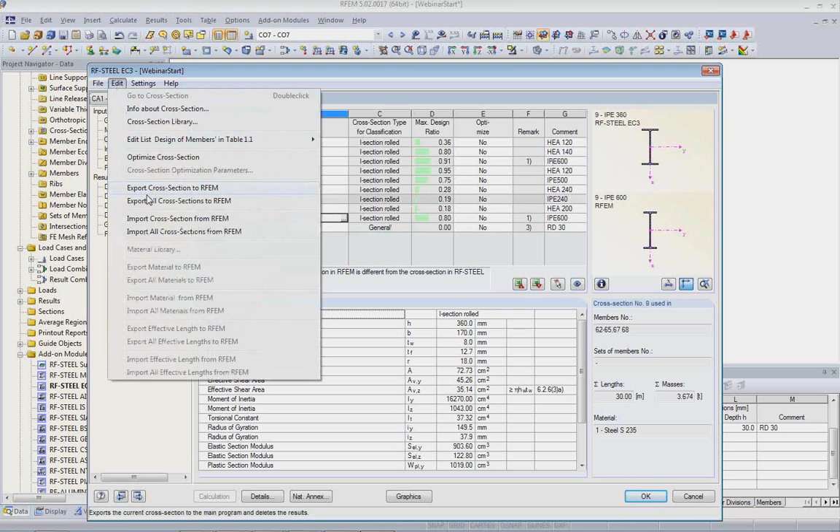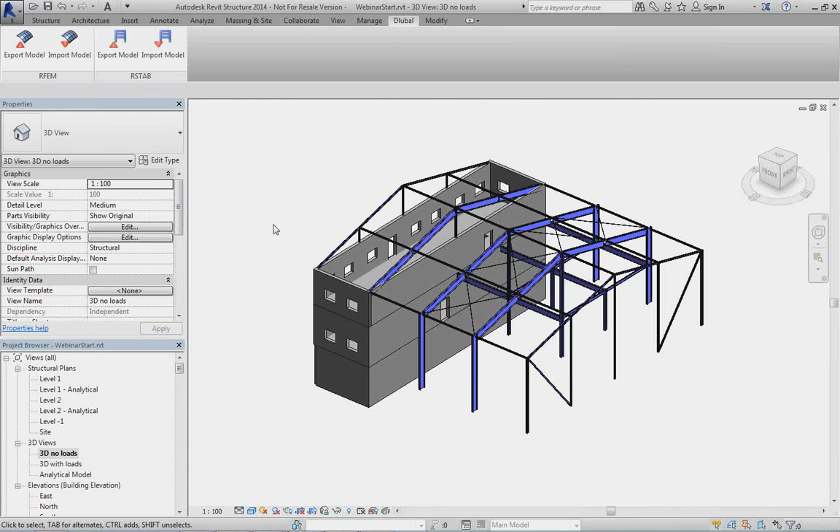So now I say this is fine, and I export all the cross sections to RFEM. Of course, results will be deleted, and then I have here my changed cross sections. This cross section I'd like to use now, everything is checked. Let's say everything is fine. These changes I need to update now in Revit structure, so I go back and import the model.

This time I don't need the loads because I don't want to change them. I just want to update my structural information. Those programs communicate again, and after a short time we should see the changes here in Revit as well.

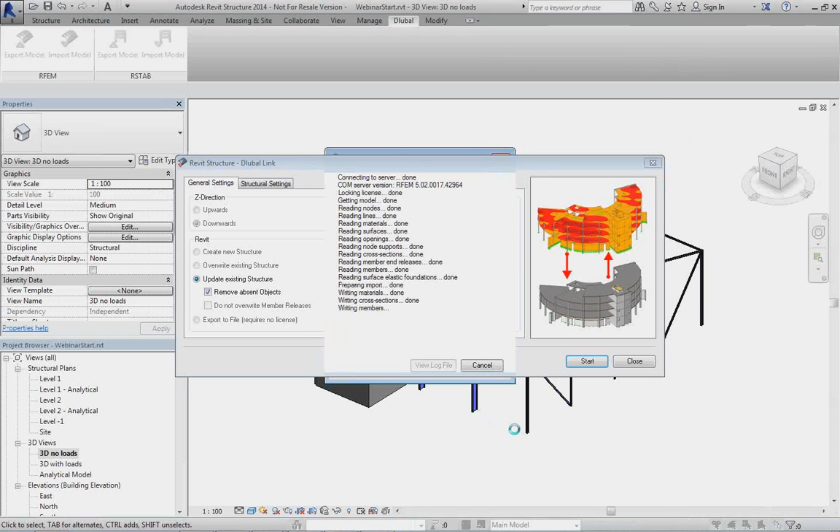So it's now writing members, and if I go here I should click on it, and then we see here IPE 360, and here we have IPE 600. So all the changes are done, and if I go back to the analytical model, I see still my loads and everything is still there.

Everything is okay, and if I want to export it again, I can do it the same way. So this was scenario 1. And the final scenario I'm going to show you now is when we start a model inside RFEM.

For this I create a new file here in Revit. I'm using a template that I have prepared for it, that includes all the cross sections and everything I need that are compatible with Dlubal. And in RFEM I open another model, which could be this one.

Let's say I have done my design for this building here in RFEM, and now I want to create a big plan with some views of the building, some explanations that typically a structural analysis software may not have this capability.

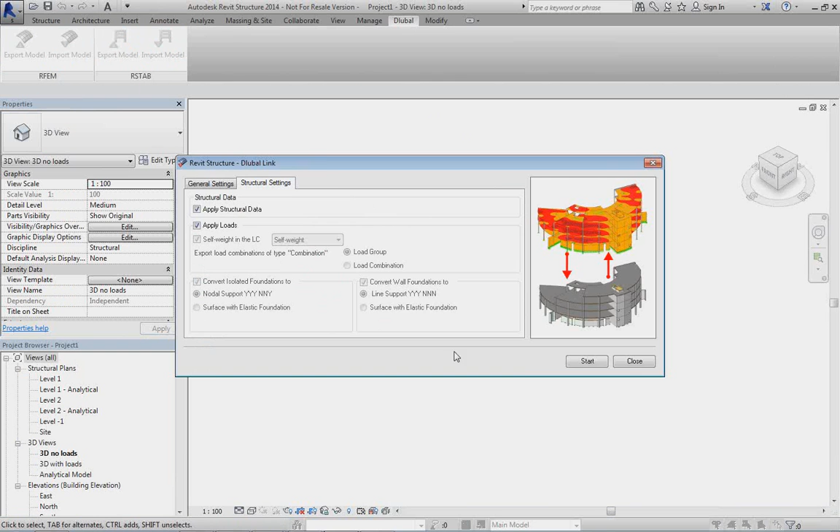So I go to Revit, Dlubal, import model. I can also get my loads if I want to. Now there is no model yet in Revit. Everything is empty, and I can save a lot of time modeling in Revit if I can use the existing RFEM model.

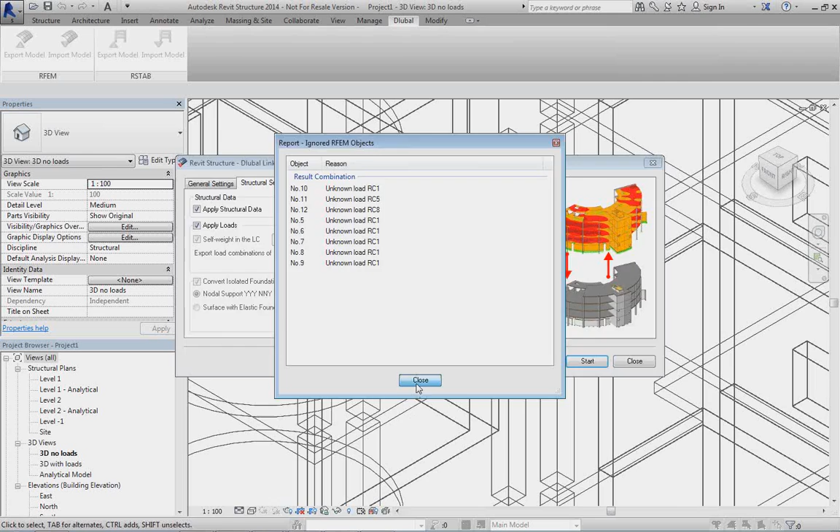There are some messages if we cannot read something because it's unknown or not compatible. There we will display a message. For example, we have result combinations which Revit doesn't have in the same way as we do, so we just leave them out for now. They are not included, and you get a warning here. But the rest is here.

And you see here there is the 3D model of the structure with all the openings, with all the round corners and everything, and we can go from this in Revit. For example, what I can do is I can create a new plan, a new sheet, A1 metric sheet, for example.

Maybe I want to have the 3D model displayed here. Maybe I want to have the east view here, the north view maybe down here, the south view next to it, and the west view here. Now I can move this a little bit in the center so I know how much room I have.

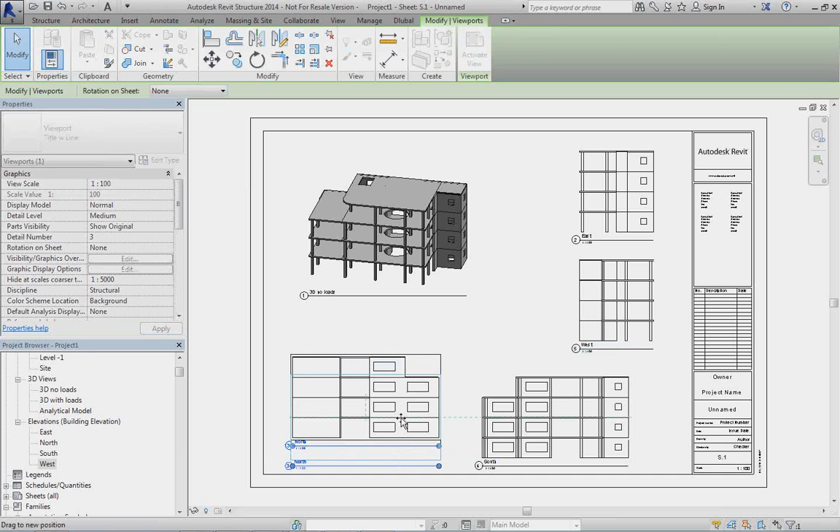Maybe I leave this here. And I have a nice drawing that I can print out, give to my structural engineers to explain. I can write there. I have all the options that such a BIM software like Revit has.

Okay, this concludes my presentation.